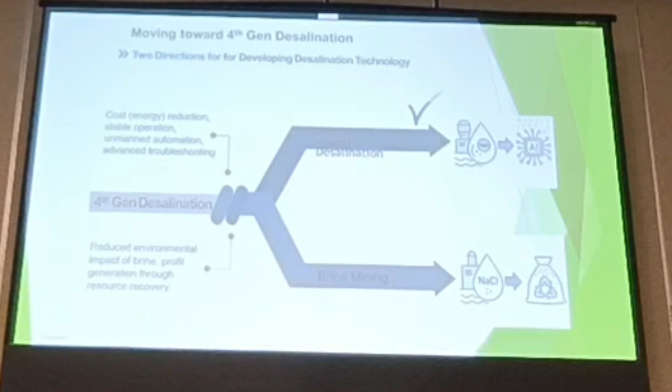When we talk about AI for desalination, there is a lot of research in academia as well as in industrial sectors. The reason many people are considering AI in academia is, for example, to predict fouling and perform preventive maintenance, and there are also needs for predicting performance. There are many reasons why we have to apply AI for desalination itself.

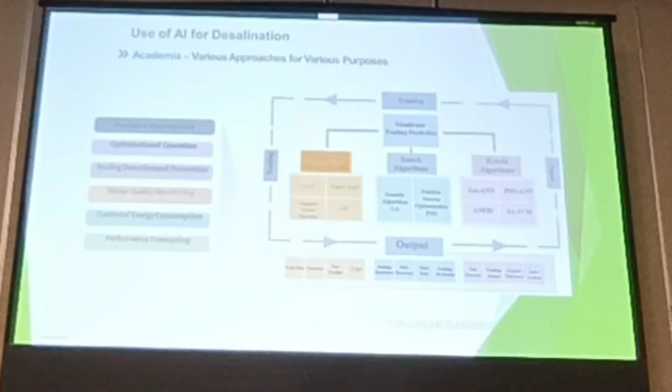Many AI models have been applied for desalination. Some of the models are for prediction, others are for classification, and there are also some hybrid algorithms. So ANN, GP and some other algorithms have been applied in desalination. As Professor Sean mentioned, there are a lot of papers regarding AI these days.

There is also a clear trend of applying AI for desalination in industrial sectors, and several companies are actively working on the application of AI. But in my opinion, these are rather preliminary. They have just started these kinds of approaches; they have presented some concepts, but they don't have clear results yet. So we can say that we are still in the early stage of applying AI for desalination in industrial sectors.

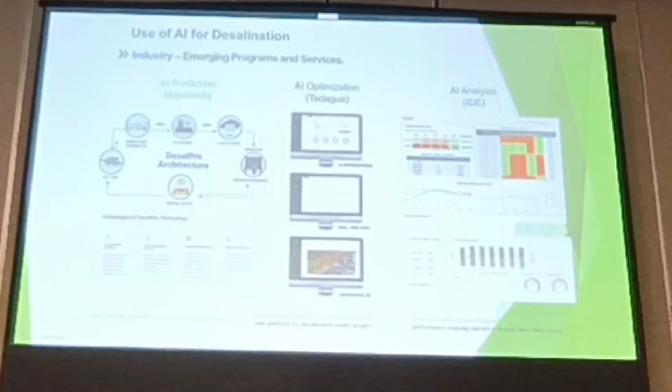Now, the reason why we need AI for brine mining. We can list some of the reasons, and those are all demands for developing technologies. These are the reasons why we need to develop new technologies by combining AI with brine mining.

First of all, brine mining problems are high-dimensional optimization problems because there are many conflicting outputs. For example, if you want to recover more resources, you need to concentrate more, and you will spend more energy. And not just energy, there are other factors affecting the overall performance. To solve these complicated problems, we need to use AI for process optimization, and this is one of the reasons why we consider this.

Second, brine mining requires the use of chemistry, and this is very complex because we are talking about more than 10 salts recovered from brines. This non-linear chemistry requires AI models rather than conventional, traditional models, and this is another reason. AI can also learn plant-specific corrections, so we can have more accurate predictions by using AI.

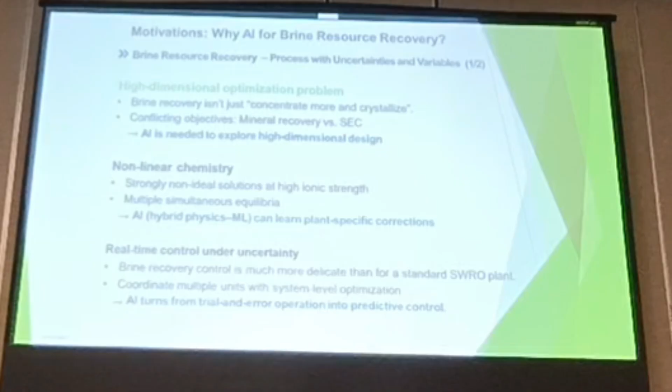Real-time control is also very important because many things change with time, especially in brine mining processes, because brine mining is a combination of brine concentration with mineral extraction, and the efficiency will change significantly when environmental factors change. That's why real-time control is required, and that also requires the use of AI.

And another situation that we have to consider is the optimization needs for the product quality and the product cost, because when we recover minerals from brine, the actual cost changes with time due to the situation in the market. And at the same time, this process efficiency and other factors will change, and they will all make this problem very complicated. And again, we needed to use AI for solving this kind of problem.

And in the future, definitely we need to combine this brine mining with renewable energy sources, because in most cases, brine mining is energy intensive, and the use of renewable energy will actually create other complex situations, and again, AI will be required for this kind of optimization.

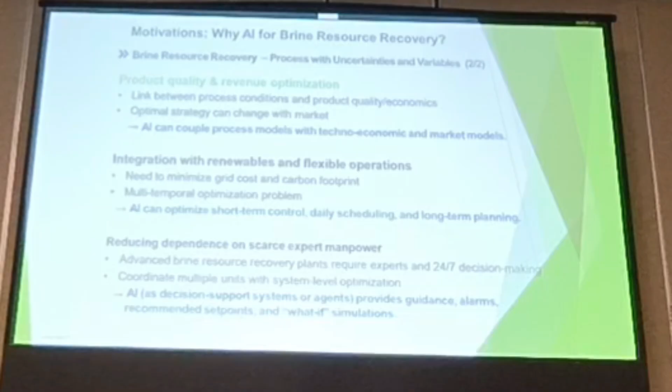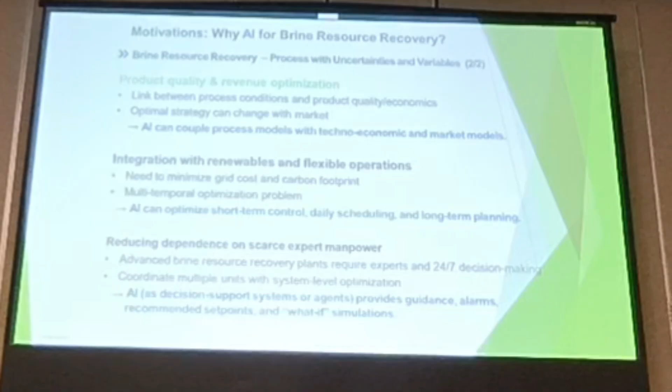And the last thing is the lack of experts in this field, because not many people can deal with the brine mining process, and in order to overcome this kind of situation, the system should be very easy, and that can actually help the operators to operate this kind of complicated processes. And these are the reasons why we started considering AI for brine mining.

At this moment, I want to introduce the new research project supported by the Korean government, which is called PROMISE, and this actually means the pioneering research on membrane-based desalination inducing sustainability and energy efficiency. So the name actually comes from this description of the project. Promise means the promise, so we want to become a promise for the bright future of desalination technology.

In fact, this project started this year, and this will last for the next 5 years, and this is a multi-million-dollar project. So more than $30 million will be invested in this project for practical implementation of digital desalination and brine mining. So this project consists of 3 work packages. The first work package is about digital desalination, and the second one is brine mining, and the third

one is the demonstration. So we don't want to just develop technology. Instead, we want to demonstrate the technology so that we can be ready for the market for commercialization of these new technologies. So the idea is very simple. We will have a desalination process, and we will develop new processes for brine mining, and the desalination process and brine mining process will be integrated and optimized by using digital technologies, including AI. And finally, we will build a demonstration plant with a capacity of 1,000 cubic meters per day. And from that, we will be ready for commercialization.

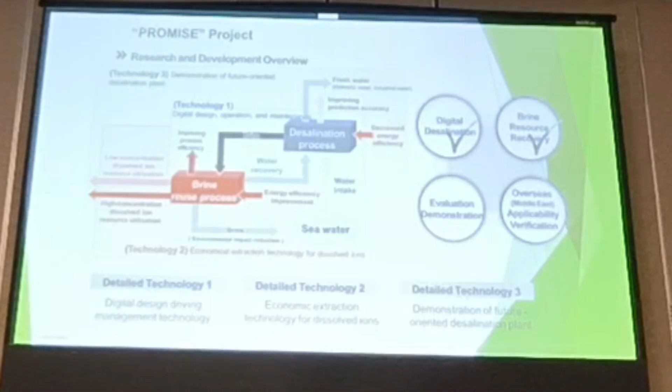As for the first work package, we focus on 3 things. The digital design of the process, which means that we can reduce the time required for process optimization, and we can find the best condition for the process performance. And also, we will develop AI-assisted operation technologies, so we can predict fouling and energy efficiency, so that we can support the people who actually work in this plant.

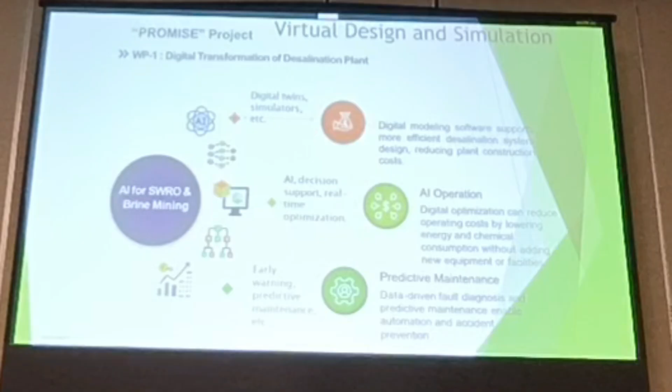And the final one is about maintenance. So by detecting faults of the pump and ERD and some other devices, we can actually perform predictive maintenance. So we have not developed anything yet, but after 3 or 4 years, we will have a prototype of the digital desalination platform. And we actually created an image of the future system, just for your understanding. So this is not a real screenshot from the software. This will be the screenshot of the future product.

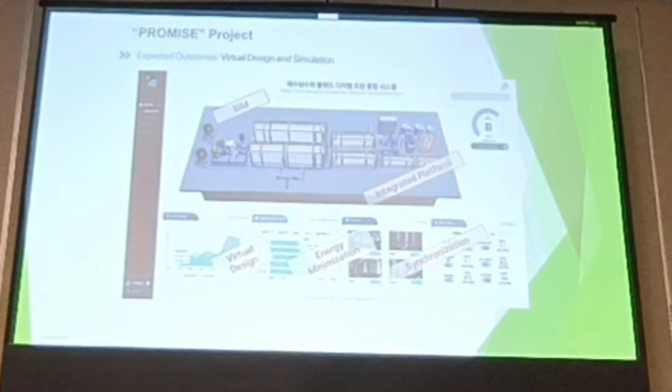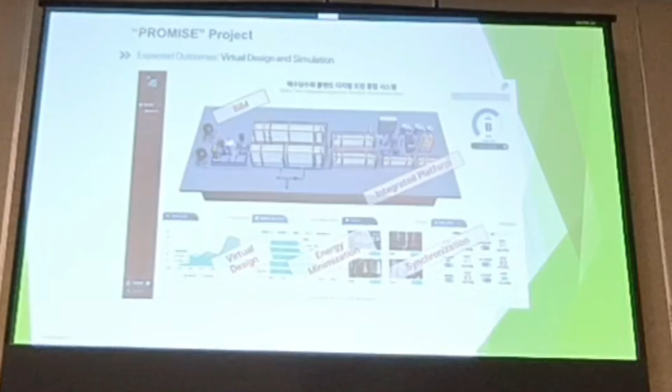But anyway, the reason I'm showing you this is that we have 3 components in this digital desalination platform. The first one is about the virtual design, consisting of the digital twin synchronized with the real plant and the energy minimization modules, as well as the virtual design. So we can change all the parameters in the digital twin so that we can find the condition for minimizing the energy consumption. The second one is the operation and the AI-assisted operations.

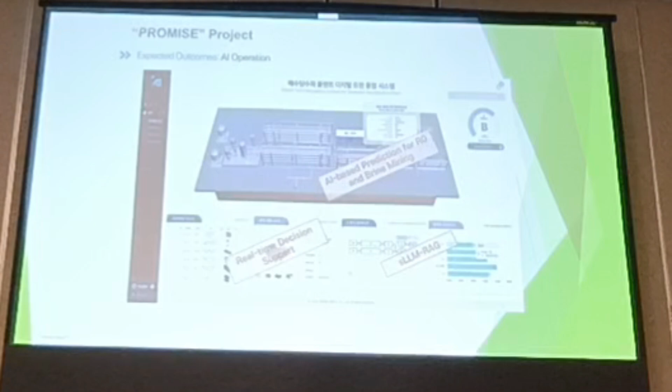So we will develop several AI models for fouling prediction, cleaning optimization, and pre-treatment optimization. And then we will develop a real-time decision support system so that people can also get information from these AI models. And we also will develop the LLM-based interface. So a large language model will be used so that people can just communicate with the actual desalination systems through the interface, which is very similar to ChatGPT or other generative AI systems.

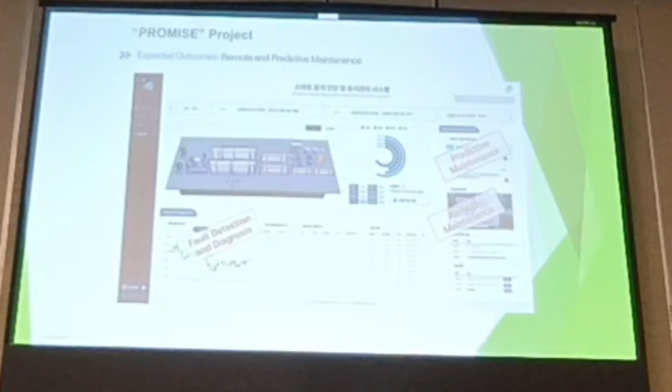And as for the final one, the maintenance, we'll develop fault diagnosis and prediction modules, and also we will use AR and VR for remote maintenance of the systems. So all these things will be developed over the next 5 years. And I just want to talk about some of the examples, and okay, I'll do that.

First of all, let's just think about the reason why we need AI for brine mining. And AI has 4 steps. The first step is, when people wanted to do things faster, they need AI. So that's the first step, so that this AI model can do the things faster than the people can do.

And the second step is the stage that this AI can do the things easier than the people can actually do. And the third step is the advanced step. In this case, the AI model can do better than the people can do. And the last step will be the stage of autonomous operation. In those cases, there is no need to have human operators, but this is the ultimate step, and we just wanted to stick to the previous 3 stages.

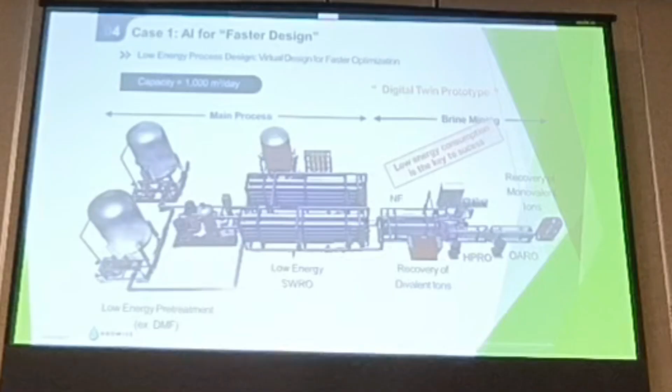As for the first case, the examples of AI for faster design. We are developing the virtual design interface and systems. This system is not only for the desalination system, but also the brine mining process. Basically the idea is there are some mathematical models as well as AI-based models for the process design.

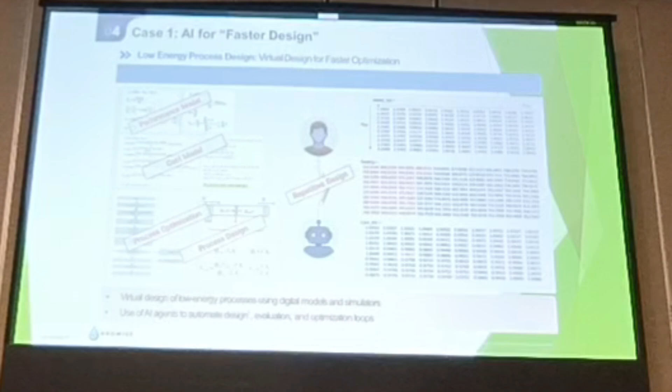The conventional way of using this technique is that people design for specific conditions, get the result, and repeat until they have some reasonable result. Instead of doing this, we wanted to make a system where this optimization can be done automatically using computer systems, so that we can reduce a significant amount of time when we consider millions of different combinations of operating parameters. We are currently doing this for the reverse osmosis system to find the lowest energy consumption condition, and we are also working on these brine mining processes.

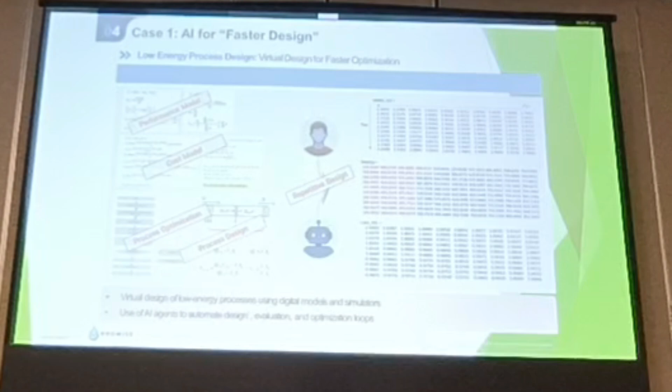So we are developing this technology, and with the limited time, I cannot explain everything, but you can understand that we are developing this kind of system one by one, and this system will appear probably within 2 or 3 years.

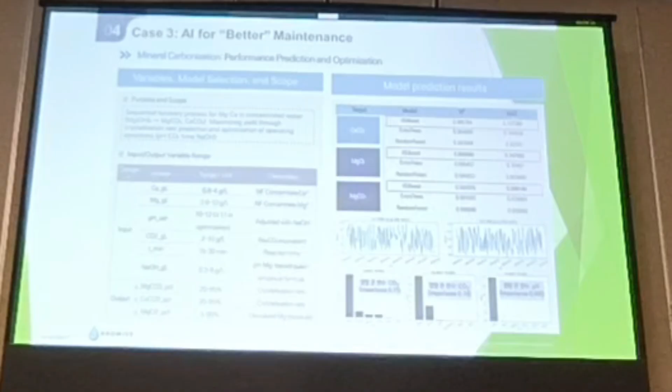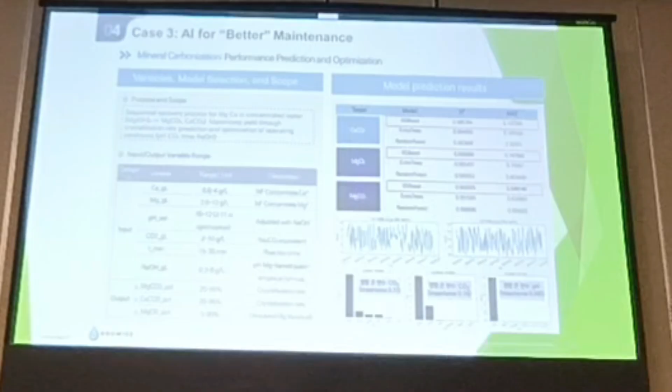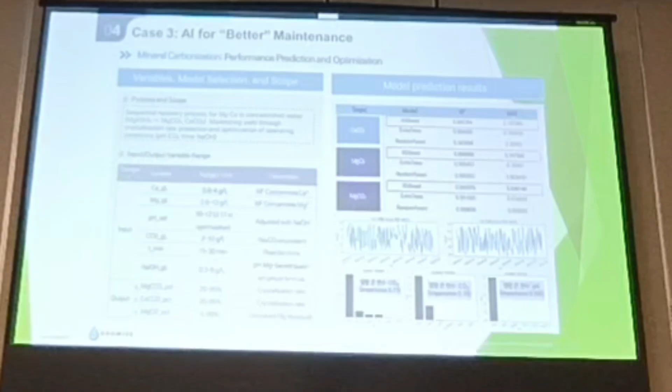The third one, we also try to use AI for better maintenance. In this case, we are developing AI models for brine mining process optimization, and in this example, we are focusing on the recovery of calcium and magnesium by mineral carbonation. Again, this requires a lot of non-linear chemistry as well as complicated optimization problems. So we are developing several AI models, and we have some complicated techniques to predict the performance. With this information, we'll eventually develop these final systems.

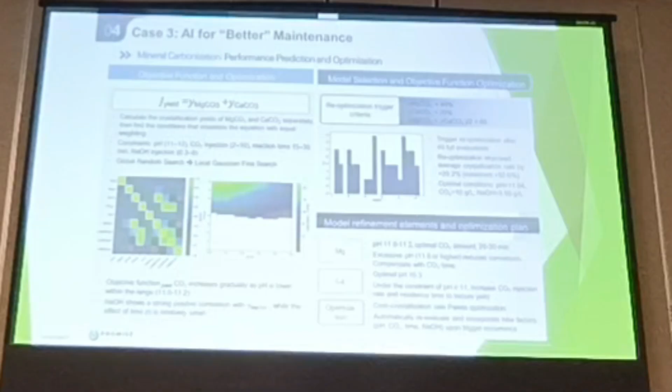Since we have just started this project, the result is not final, and we are just going in these directions. So again, feel free to let me know if you have any ideas and suggestions for this kind of approach. The last one, technical challenges.

As you know, AI is not the solution for everything. Instead, it has a lot of limitations. AI is a black box model, so we don't know what's actually going on inside this model. And models drift significantly, and data is limited. We wanted to have some abnormal data, but most plant data is normal data. So there's a significant bias in the data for training AI models for desalination and brine mining. And there are some skill gaps that should be overcome.

The possible solutions that we can suggest are, first of all, we need to go for explainable AI rather than conventional black box AI. This will reduce the risk of AI artifacts, and we can use monitoring and MLOps kinds of approaches to reduce model drift, and we can create generative data to overcome this data bias. So there are several techniques suggested, and by doing this, we think that we can significantly overcome the challenges related to AI applications to desalination and brine mining.